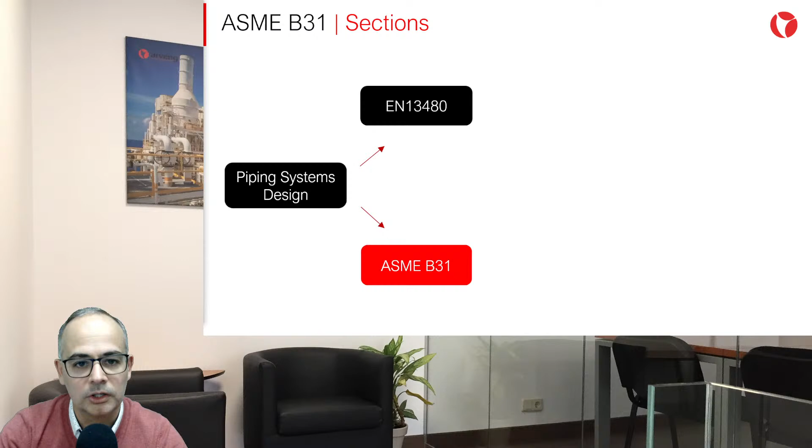We are going to be focusing on ASME B31. And if we want to discuss or talk about ASME B31, first we have to cover the structure. So that was the original question: how is the B31 structure? Well, the ASME B31 is structured in subsections or subcodes, let's say. We have the B31.1 for power piping, B31.3 for process piping, and so on and so forth.

Now, when I change the slide, we are going to cover the most important ones. We have to dedicate a special mention to the ASME B31.12 that we can see at the bottom of the list.

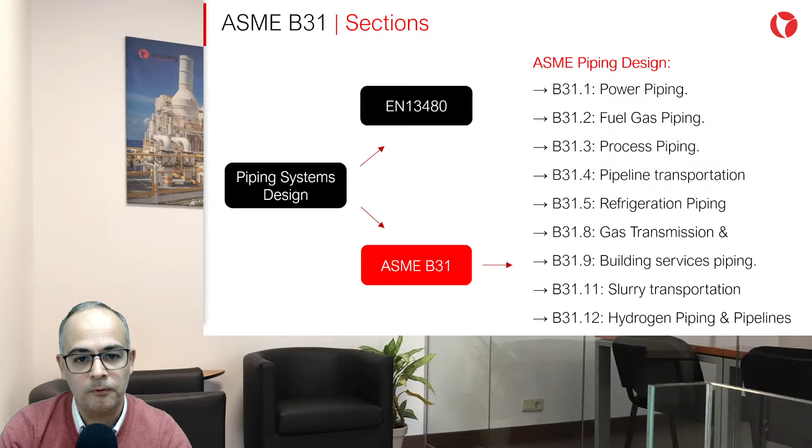B31.12 is not a new code. It's been around for over a decade now, but with all the projects and push given to hydrogen, especially the green hydrogen industry, it's something worth bearing in mind, because B31.12 has become a very important reference for developing green hydrogen projects. We can discuss this further at the end of the webinar.

If we start discussing the different subcodes or committees within ASME B31, we find, for example, B31.1, one of the most used codes. This subsection is used for the development of electric power plants, for example, or the power generation sector.

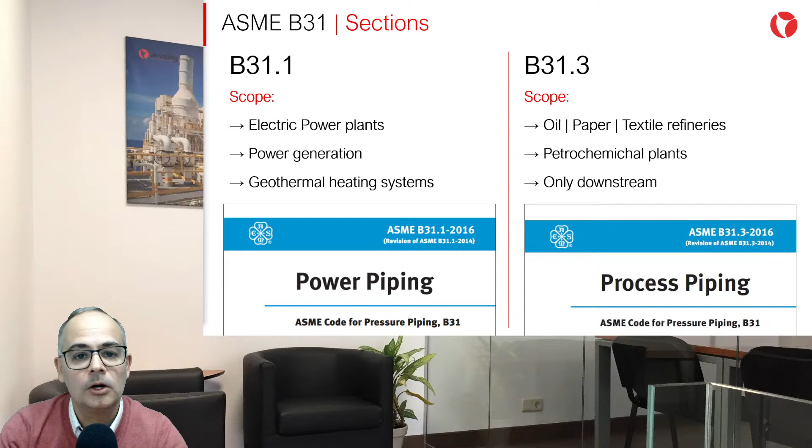Then we can mention B31.3. This is probably the most used subsection within B31. It is used for refineries, could be oil, paper or textile refineries, also used for petrochemical plants, and it's worth mentioning that it is used only downstream.

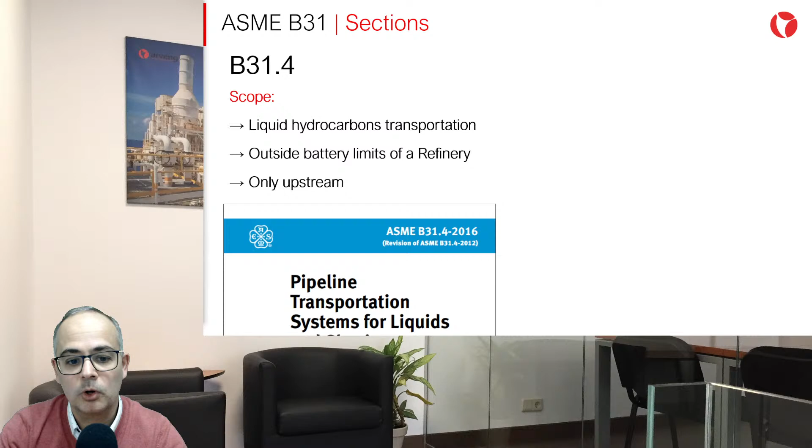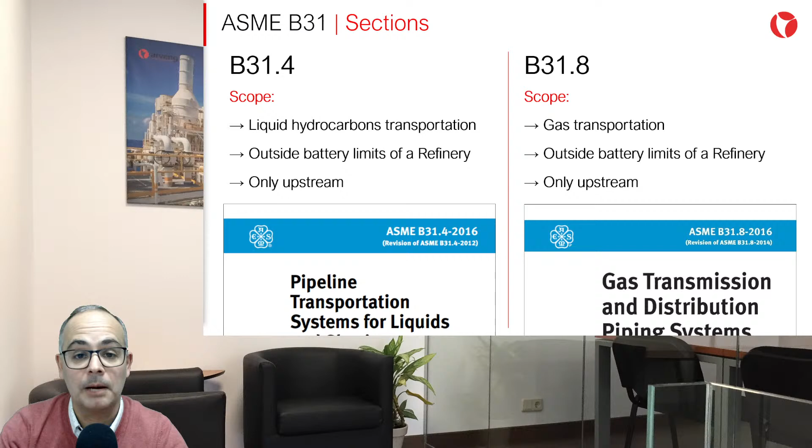Then we find another very largely used code, B31.4. This is for liquid hydrocarbons transportation, only upstream in this case. In the same way, we find B31.8, used for gas transportation. This code is, let's say, the equivalent to B31.4, but for gas transportation, and at the same time it's only applicable for the upstream sector.

That is just a brief explanation of the organization of the B31 committee.

Another question we receive a lot is the following: are there any related codes or specifications that complement the ASME B31 code? The answer is yes. There's not only one, there are a lot of standards, material specifications, and other relevant codes used in conjunction with the B31 code.

So the first thing in a project is to select the design code that is going to be applicable. Once the subcode or division, B31.3, 4, 8 or B31.12, is selected, the next step is to understand which standards are permitted, or which standards we have to use.

Those standards or specifications that define the geometrical characteristics, and in some cases the pressure-temperature rating, of the different components are going to be indicated in each design code.

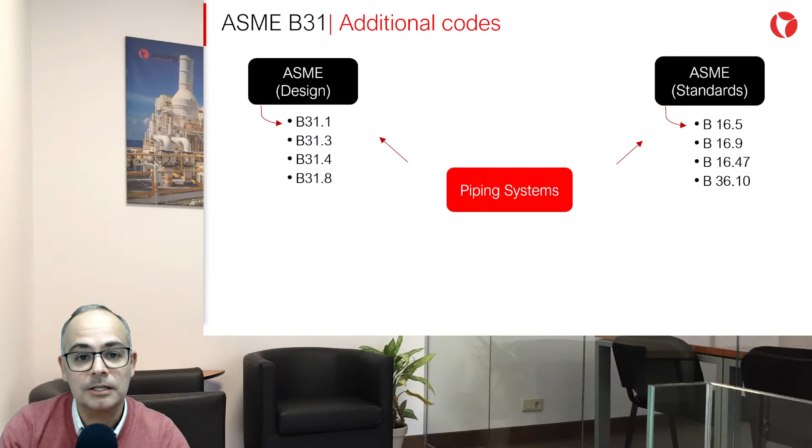For instance, if we go to the B31.3 code and we're not sure which components or how to select the different components for a particular design, we go to a specific section on components, and we find a table, a list of standards that are eligible to be used within that design code. That's the way to be sure of the selection we have to make.

Besides the standard needed to select a specific component, we need to select the material as well. The material designation of the different components used in a piping system needs to be specified as per ASTM specifications. These are the material specifications. So a seamless pipe is going to be A106 grade B, for example, and so on and so forth.

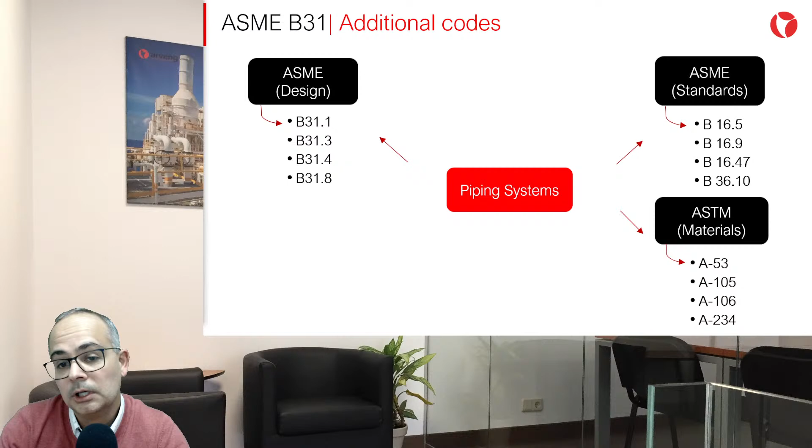But this doesn't end here, because besides the standards and materials, we have some other standards or specifications, in this case for example those of the API, the American Petroleum Institute, that are able to work in conjunction with the ASME B31 design code. So, for instance, for a specific project, we could use a pipe from the API organization selected using the API 5L specification. That's just one example of how different specifications from other organizations can be used in conjunction with ASME B31.

Apart from that, we can find MSS SP standards or AWS standards as well, from the American Welding Society, that are also going to be used in conjunction with ASME B31. This is just a map to put on the table all those standards and specifications that need to be controlled, or that we need to have under our radar, because sooner or later we're going to come across one of them, and we need to understand when and how to use them.

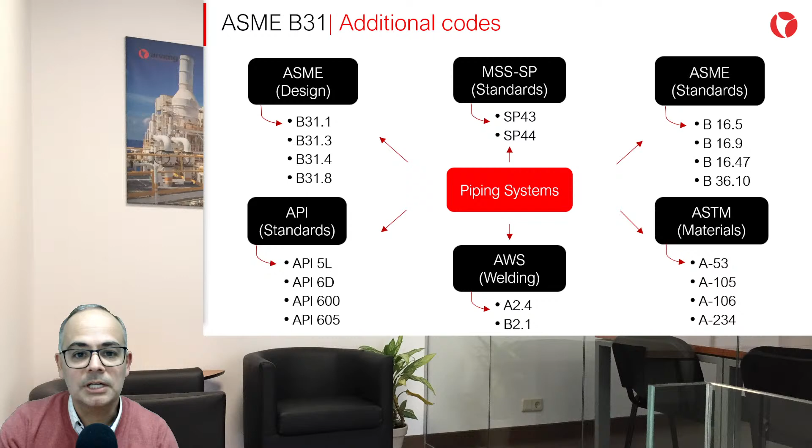Here on the screen, I thought about bringing a potpourri of different components joined together, with the only purpose of providing some aid for us to go and look for the standard that is going to be applicable in the design of our ASME B31 piping system.

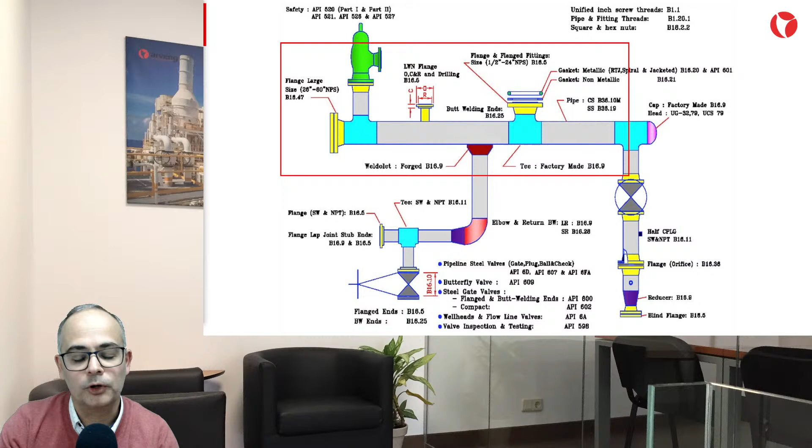So, for instance, if we need to select a pipe or a flange, we go to the right side of the picture, and we see that for a carbon steel pipe, we need to go to the ASME B36.10 standard, or if we need to select a stainless steel pipe, we go to the B36.19 standard. In that way, we identify each component, and then we understand which standard we have to check in order to select the component we're looking for.

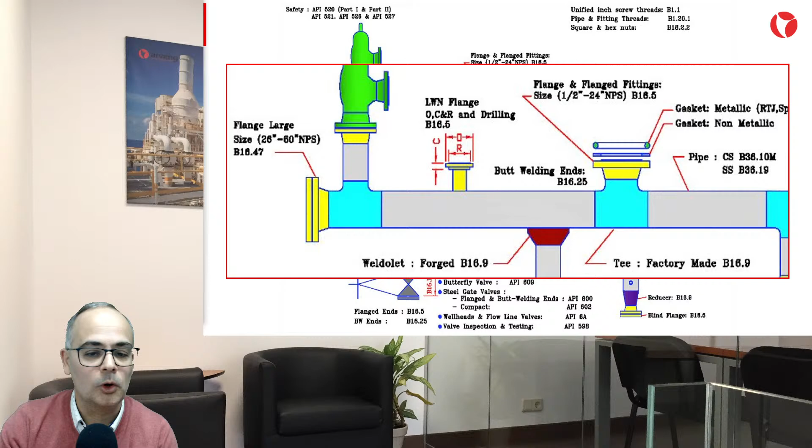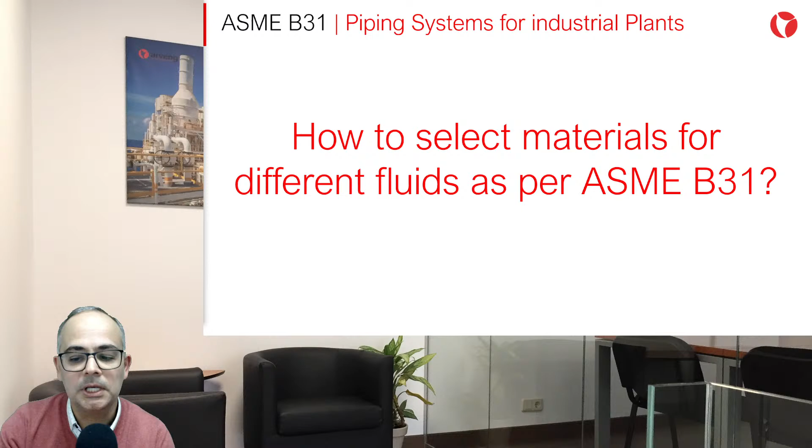Another question we get a lot is how to select materials for different fluids as per ASME B31. This is a very good question, and unfortunately I have to bring bad news - that's a joke, of course. There's no such thing as bad news, it's just information, and what matters is what we do with it. In this case, the information isn't going to help us a lot, because codes do not suggest or recommend any specific material for any specific application.

For example, if we have to select a material for a piping system to work with a fluid that could be, say, demin water, the ASME B31 code is not going to indicate which material is going to be adequate to tolerate the corrosion that may be present with that fluid. This applies not just to ASME - it could be the European code, Russian, or whatever code. They are not going to indicate which material to use for this, that, or the other fluid.

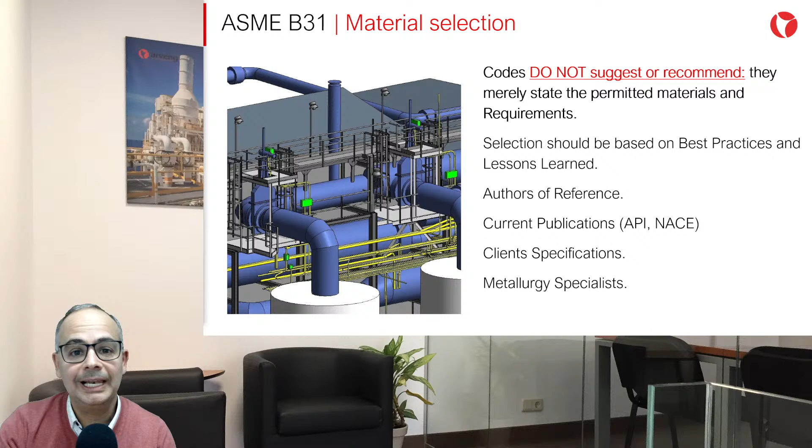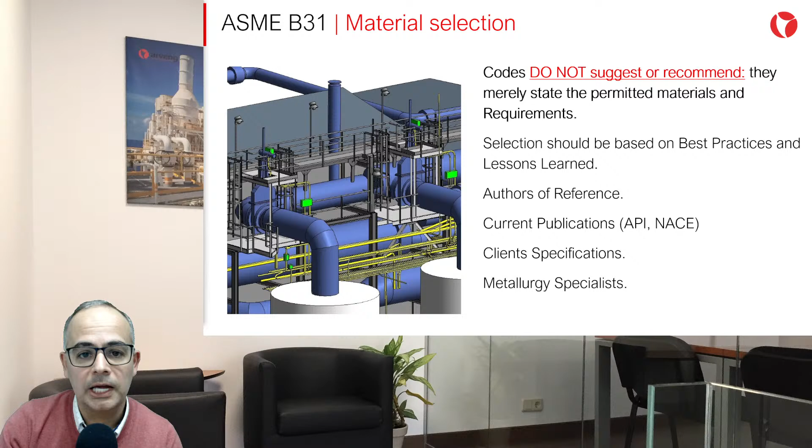At the end, if we do not have the knowledge or resources to select the material, we're going to have to count on a group of metallurgy specialists to develop the material selection for the project. Bottom line, design codes are not going to help us in this way. Design codes are only going to list or enumerate the different materials available for the whole universe of fluids, but they do not specify which material for which fluid.

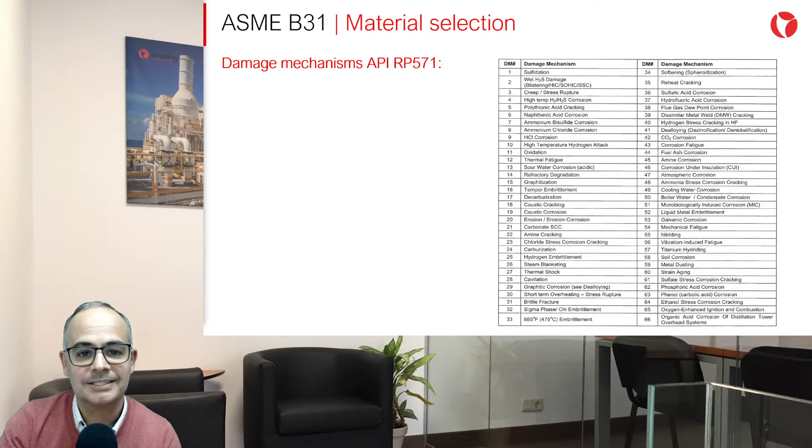To give you a brief overview of the different damage mechanisms we could face in a project, we only need to look at the API RP 571. This is a specification from the American Petroleum Institute, and it deals specifically with damage mechanisms for, let's say, the oil and gas sector. In this recommended practice, we can see different damage mechanisms such as wet H2S, HCl corrosion, HIC, hydrogen, high temperature hydrogen attack, thermal fatigue.

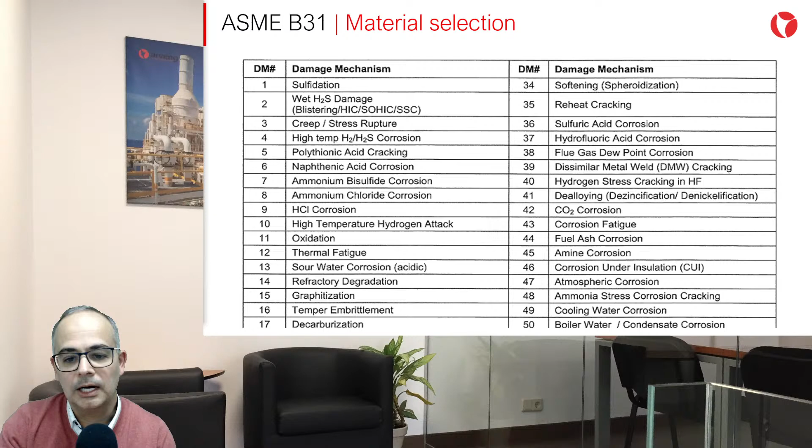It could be temper embrittlement, it could be galvanic corrosion. We could go on and on for a very long time describing and diving into these damage mechanisms, because it's an entire specialization field - a very nice one - that's a little bit apart from piping design. Completely necessary, but not the same as piping design. It's just a specific specialization field carried out by metallurgy specialists.

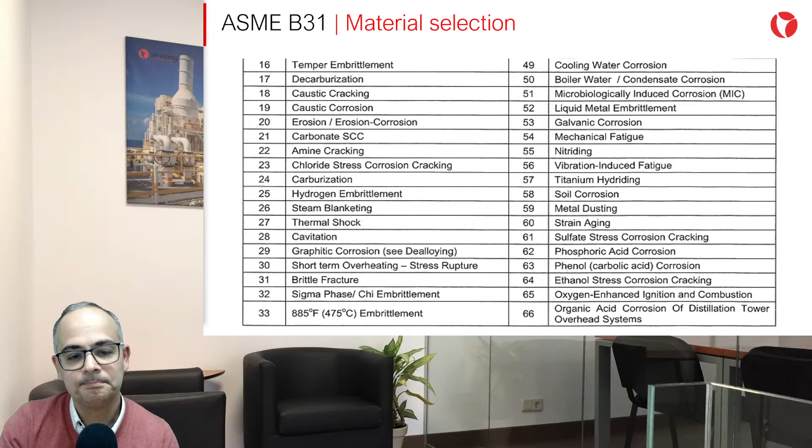We cannot cover material selection as a whole, because we would probably need a master's degree program for more than a year. But we can cover another question that's very often asked: how to define the corrosion allowance of a system? In other words, what is the meaning of CA 3 millimeters? I'm sure all of you present and following this session are familiar with the term CA 3 millimeters.

CA stands for corrosion allowance. In basic terms, the corrosion allowance is the part of the thickness of our pipe that's dedicated to withstand the corrosion that's going to happen over the years during the service life of a piping system. That's in basic terms. But why do we often see this CA term with 3 millimeters, or 1.5, or even 6? Why 3 or why 6? Well, the answer is pretty straightforward.

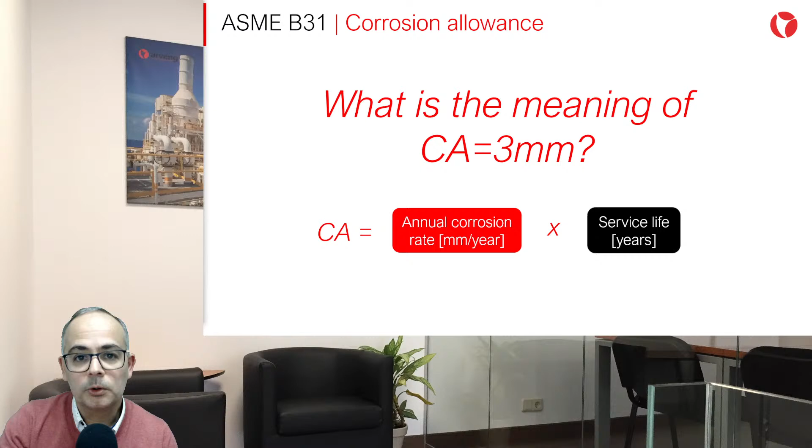And then we have the annual corrosion rate. The annual corrosion rate is just the rate per year at which a specific material corrodes with a specific fluid. Obviously, the temperature is kind of important in order to determine this annual corrosion rate. And we're not talking about just a material and a fluid, we are talking about a specific pair, material and fluid.

For example, on the screen we are seeing a nice graph that was developed by the NACE organization, that is the National Association of Corrosion Engineers. In this case, we are seeing a graph from the Corrosion Engineers reference book, and in this book we can find many different pairs of materials and fluids, and depending on the temperature and also depending on the composition of the fluid, we're going to be able to determine an estimated annual corrosion rate.

And with that annual corrosion rate in millimeters per year or in mils per year if you use imperial units, you multiply it by the service life of the equipment, and you're going to end up with the corrosion allowance.

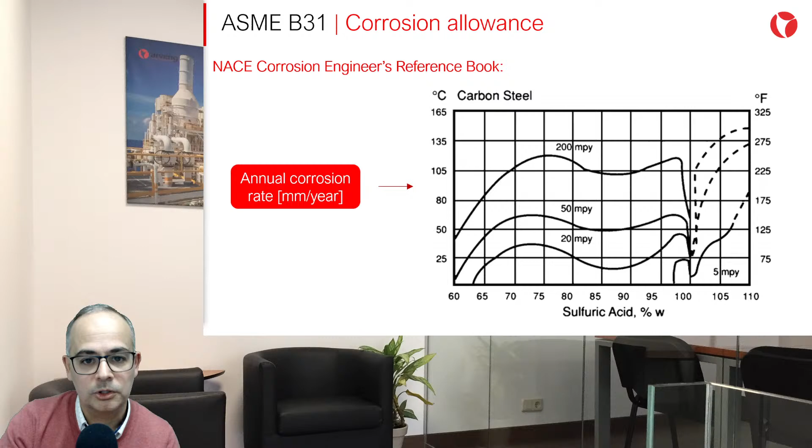Good, let's move on. Another very important question: what are the main variables involved in the wall thickness calculation of a pipe under internal pressure? Well, this is kind of a basic one, but yet there are still some questions or misinterpretations, let's say, from these equations.

All these equations are applicable for thin-walled cylinders. That means that the thickness is very small compared to the diameter. That is the relationship, let's say the requirement, that we can see in all these equations. And if we explore, for example, the different committees of B31, we could evaluate on the top left corner B31.1, going to the right B31.3, 31.4, or 31.8.

We are going to see that the basic reasoning or the basic deduction of these equations, it all comes from the same source. It cannot be any different, because they all share the basic principles of classical mechanics. So the principles are all the same for every single design code. And that being said, once the basics and the classical mechanics principles are used, the different design codes are going to use different safety factors or different factors in order to account for temperature, type of materials, place or site of installation, or different details, but the basic principles are the same.

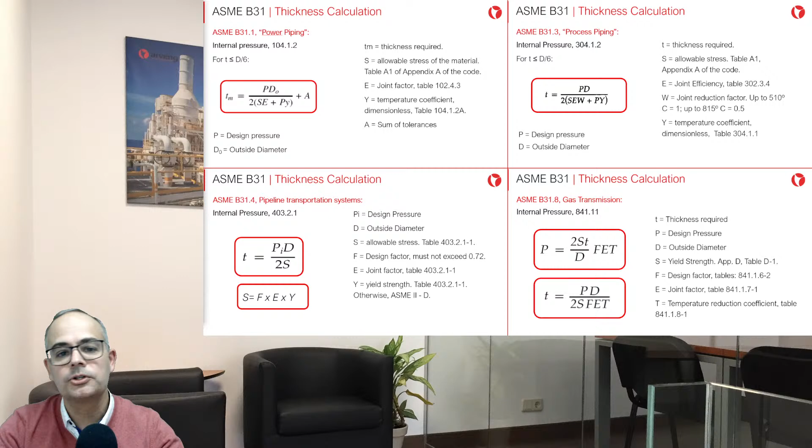So we're going to do the following exercise, and we are going to cover ASME B31.3. I could have chosen any other committee or subgroup, but in this case I'm going to use B31.3 just as an example. So the equation for B31.3 that is stated in section 304.1.2 of the B31.3 code, as I was saying before, for thin-walled cylinders...

The thickness of a pipe that is subjected to internal pressure is directly proportional to the design pressure that pipe needs to withstand. It is going to be directly proportional to the outside diameter of the pipe as well. So the more pressure we have, the higher the thickness. The larger the diameter, the higher the thickness.

And then we have some terms that are going to be indirectly proportional, such as the allowable stress, S, that is a mechanical property dependent on the material we select. Then we multiply that allowable stress times the joint efficiency. The joint efficiency of a pipe refers to the welded joint, and specifically the longitudinal welded joint. So if we are using a pipe that is seamless, with no weld, we can forget about this joint efficiency factor, and it is going to be 1 because the pipe is seamless.

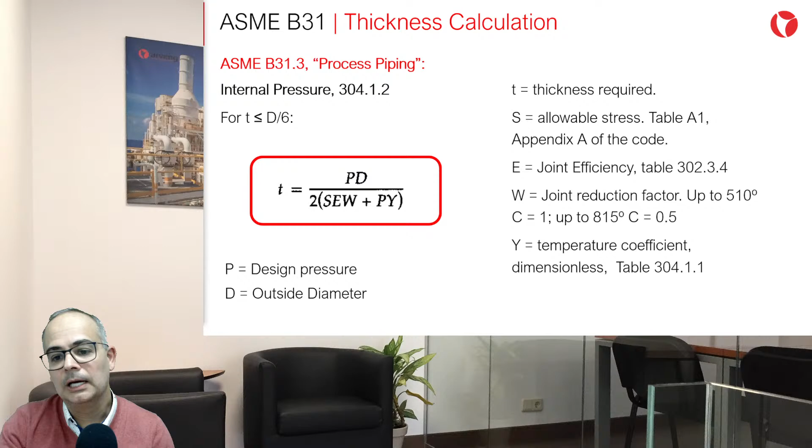Good. Let's move from the ASME B31 internal pressure to the stress and flexibility analysis.

What is a flexibility analysis? What is a stress and flexibility analysis? Well, we need to perform a stress and flexibility analysis due to the temperature change of a piping system.

What is the temperature change that a piping system might experience? When we erect or install a piping system in the field, normally it is installed at the ambient temperature on site. Let's say 20 degrees, 25, could be 1 degree below zero, whatever temperature you want. That is the ambient temperature at which we erect the piping system.

But apart from that, once the piping is operating, the operating temperature of the system is completely different than the ambient temperature. Perhaps that temperature is, I don't know, 250 Celsius degrees, for example. So from 250 Celsius degrees to 25 Celsius degrees, we have a thermal gap of 225 Celsius degrees.

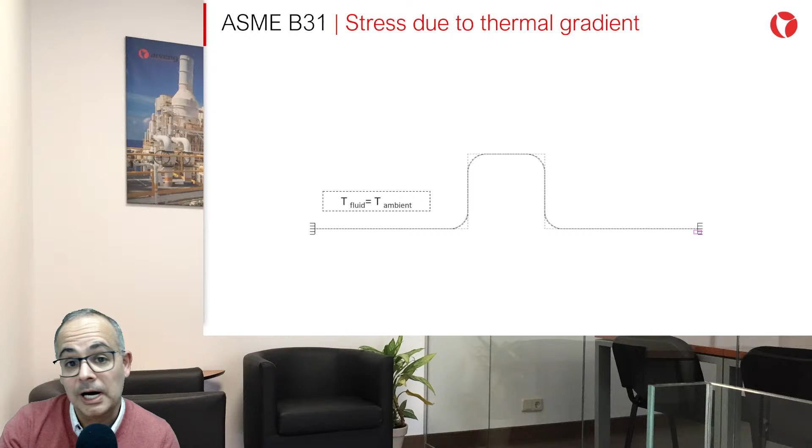We all know what happens to metallic materials when we subject them to a thermal gap. They tend to expand, and that expansion is the cause of a lot of issues and problems in our plants. So that is the reason why we need to evaluate a system for flexibility and stress, in order to confirm that the system is not overstressed.

So, on which ways do we have in order to increase the piping flexibility? Well, there are mainly 3 ways to increase the piping flexibility in a system.

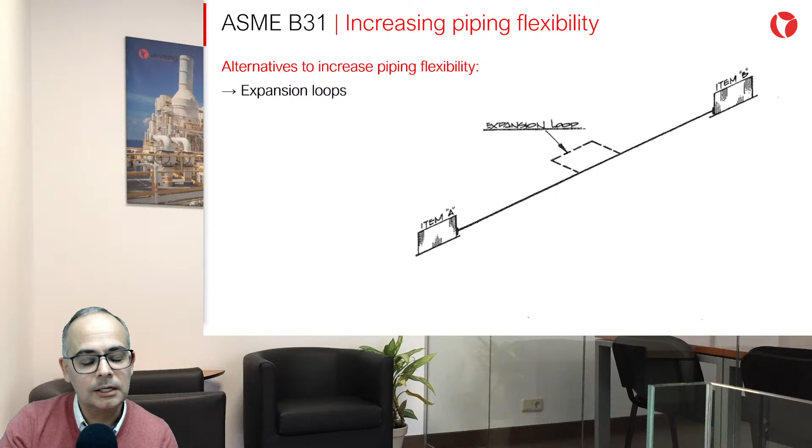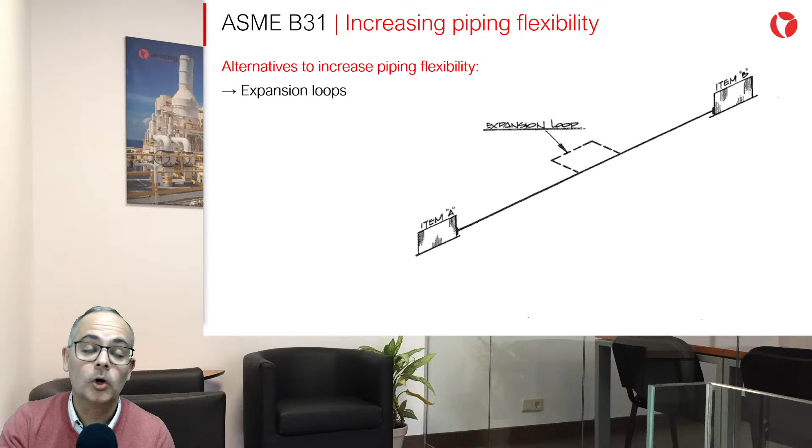One of them is by using expansion loops. In other words, to change the direction of the pipe. If we change the direction of the pipe, we are increasing the flexibility, because elbows are a lot more flexible than a straight run of pipe. So when we change the direction 90 degrees, the result of that change is a more flexible system.

Then, we already mentioned direction change. With this direction change, we can relocate equipment, for example, if possible. Instead of locating item A in line with item B, we can relocate item A, and in order to relocate it, we are going to have to use direction changes.

And the third method would be to use expansion joints. These are mechanical devices used in order to absorb axial displacements of the pipe. These devices do have some limitations in terms of temperature and pressure, so the preferred method is just to use direction change, not expansion joints.

For most applications, it is always difficult to try to generalize and arrive at a beautiful recipe for every single case, but magic recipes do not work for these designs, since we are normally dealing with one-of-a-kind, or ad hoc, solutions. So a magical recipe is not going to be suitable for every single scenario.

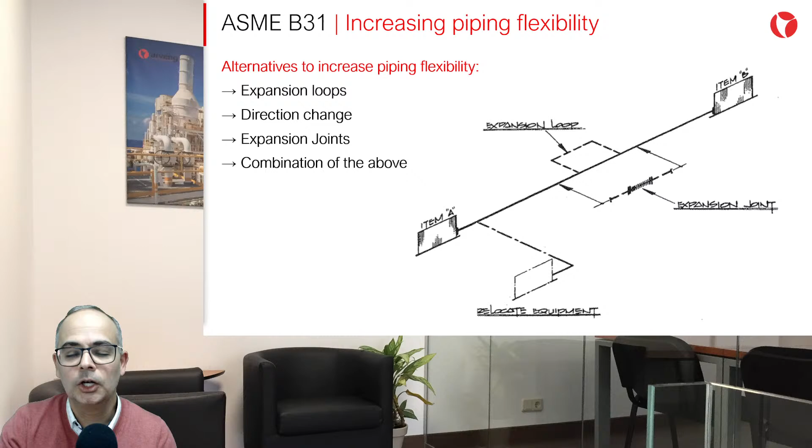Okay, we have arrived to the end of the questions that we had prepared in order to go over this session. So I'm going to move to Autumn to see if there are any questions.

Oh, yes, we have some questions ready and waiting for you. Thank you very much for the presentation. Okay, my pleasure. So as Javier said, we are now opening up the question and answer session.

We have one question from Fran, who is connected from Buenos Aires. He asks, can expansion joints be used with sulfuric acid service according to the code, or any category M fluid in any case? I've seen P&IDs with EJs indicated on such systems, but it feels a bit risky.

There's the microphone. No worries, we are sharing microphones here.

Okay, Fran, this is a very good question. I have seen it used in both ways, in projects with sulfuric acid and not used in projects with sulfuric acid. In terms of the code, it is permitted as long as the fabricator, the manufacturer of the expansion joint, certifies that it is adequate for that fluid. There is no restriction; this is just a matter of the owner or developer of the project. Normally, project specifications, in our experience, are not going to allow expansion joints in such critical services. But again, this is going to be a matter of the specifications of that specific project. Very good question.